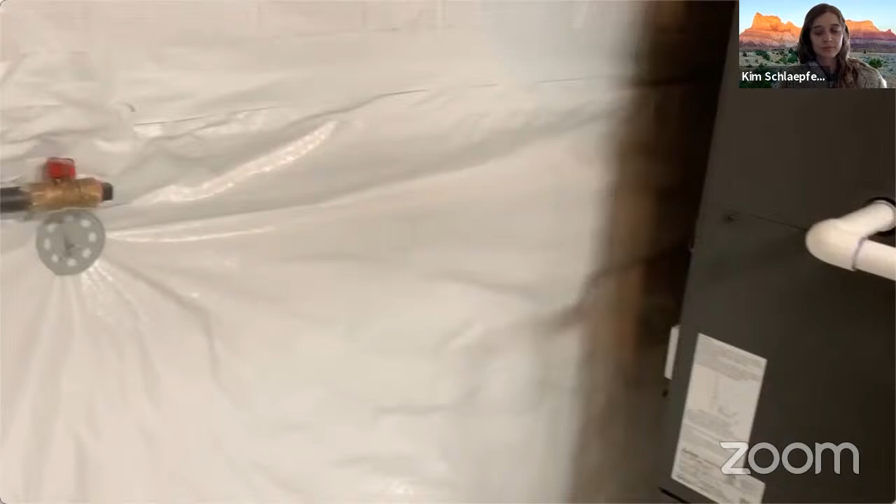Hey, Tim Braun here. Just want to talk to you a little bit about a cool project we have going on to take a standard residential home and see if we can convert it into a net zero home. This project all started when the owners wanted to install a breezeway that connected the home to the garage so they wouldn't walk in snow. But hey, while we're at it, let's go ahead and put a lock-off in so that we have some affordable housing.

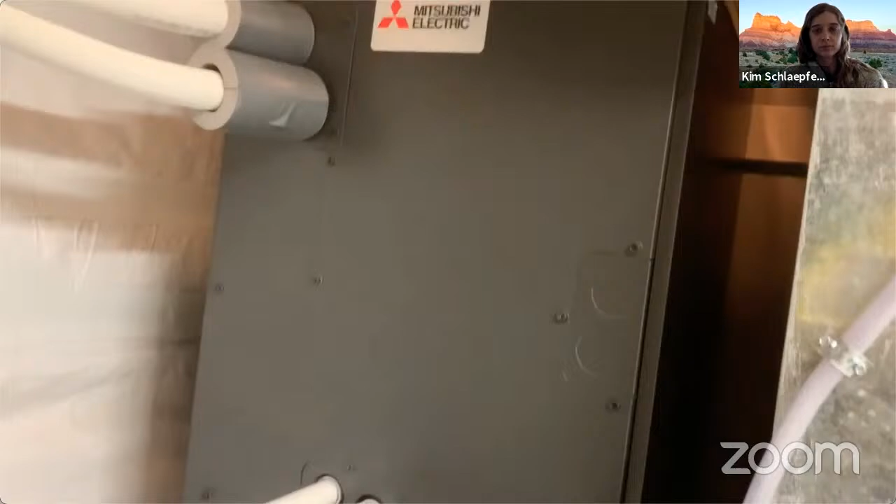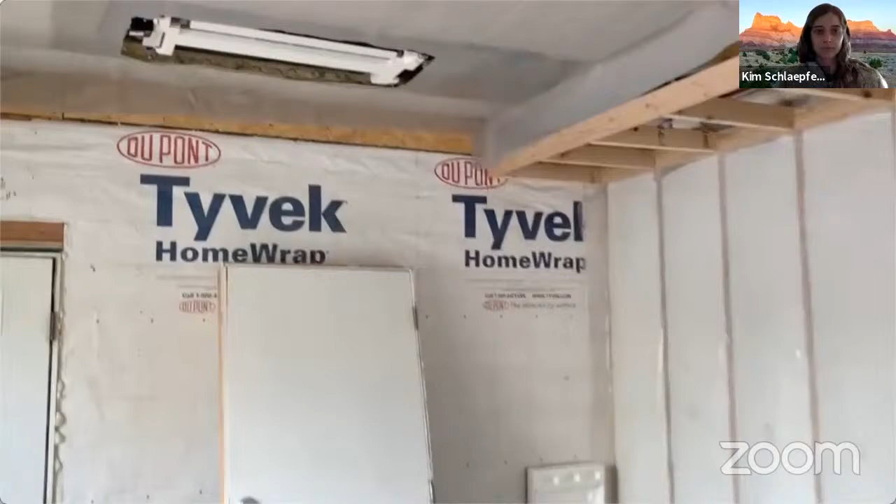If you look, we plugged the gas and went ahead and installed a multi-position air handler from Mitsubishi that is serving the main house. That branch box right there is actually coming from the outdoor unit. It's feeding the main home as well as the breezeway that you can see here is very well insulated. But we installed an EZ ceiling cassette unit in this space. This is the outdoor unit that's serving both of those zones.

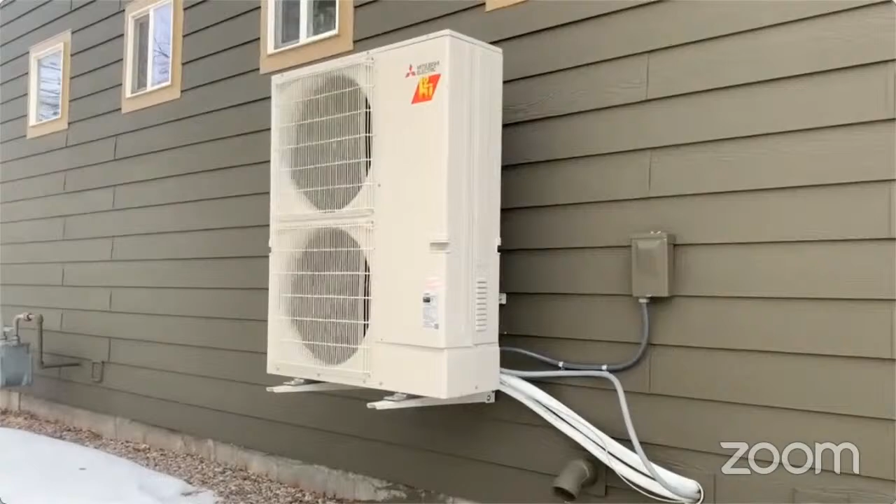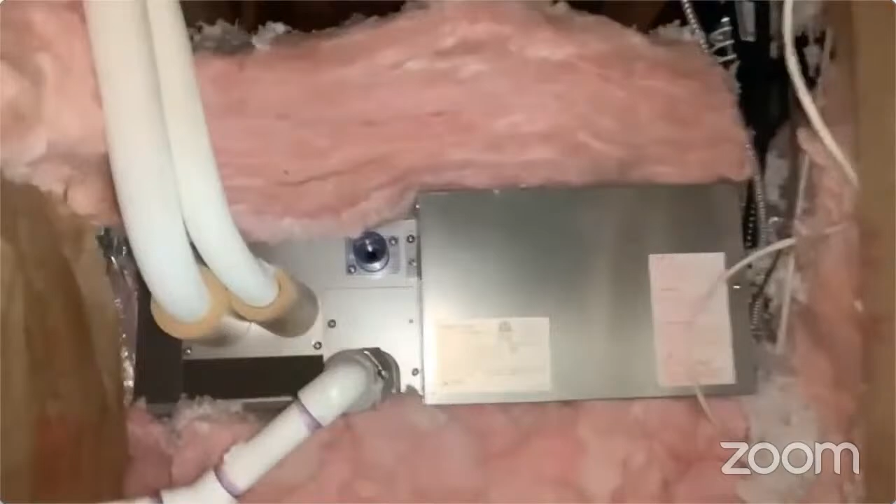This system will go down to negative 13 degrees, and we're just testing to make sure that it does what it says it will. We're up in the lock-off now. This is a ducted system, and you can see the insulator's got a little bit crazy with the insulation up here, and we got some cleanup to do, but all in all, it's very well insulated.

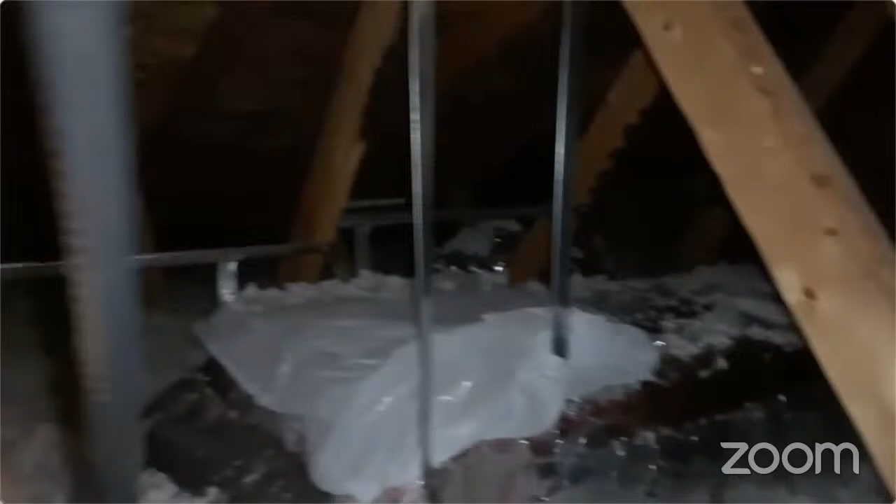It's serving the entire lock-off from the ducted system, and works really well. On the outdoor unit, you can see it's a hyperheat system just like the other.

The big opportunity we have to go net zero is solar generation on the roof. Any connections there would be greatly appreciated.

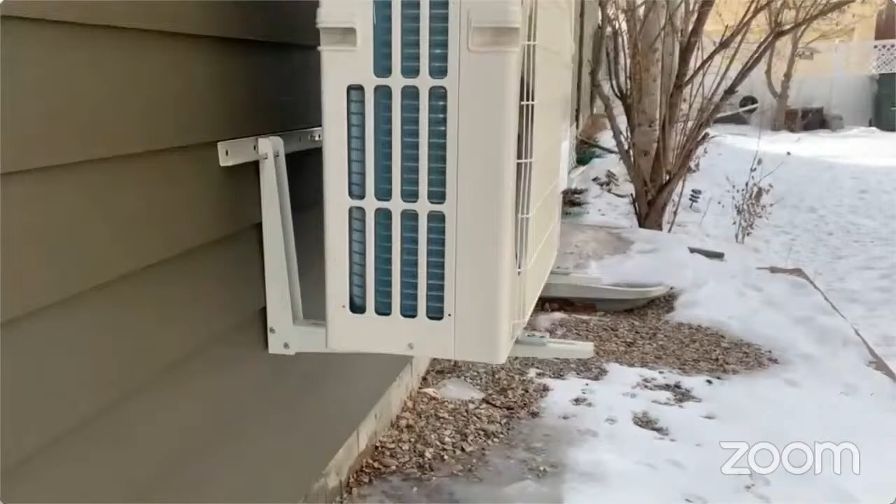Some of the issues we had were these wall brackets causing a little bit of vibration when we were starting up the system. Also, with adding square footage to the home, we've got to consider the amount of power that's going to these homes. But all in all, the system went really well. We could have gotten the equipment a little bit faster, but it was an awesome project altogether. Thank you for all that you do, and thank you for listening, and have a great day.

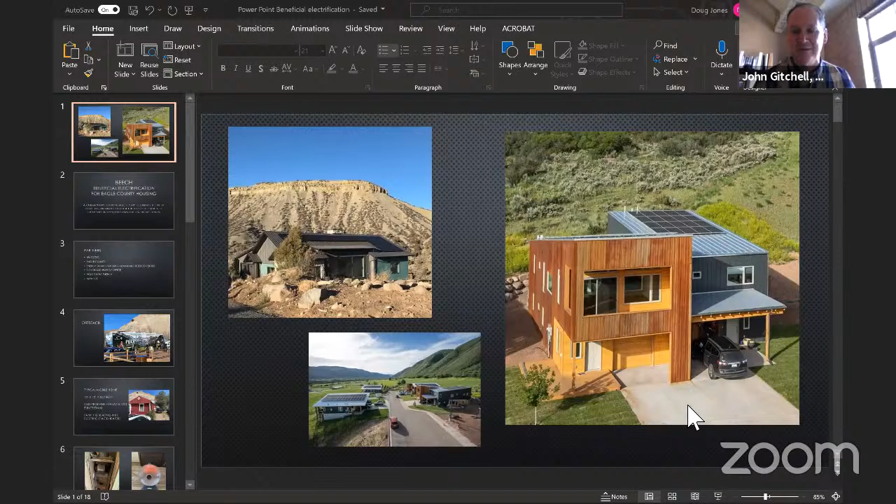I do want to say that our close friend and colleague Seth Bossum was deeply involved in this project, and he helped with all aspects in the planning and in the energy modeling, and just in his overall thoughtfulness and care with every step along the way. So with that, I'd like to introduce Doug Jones. Doug is the director of the weatherization team for Northwest Colorado Council of Governments, or Northwest COG. Their programs deliver services to income qualified families in 13 different counties across northern Colorado, including Eagle County. Doug and his colleague Nate have been leading this weatherization group for over 20 years. I want to turn over the presentation to Doug, and thank you for being here today, Doug. Thanks, John.

See if I can't pull this off.

Basically, the BEECH project is bringing beneficial electrification to Eagle County residents, low income. It's bringing different funding sources together to provide beneficial electrification to low income clients in Eagle County.

We started talking about this in February of last year, and then of course the virus hit and we took a big break. Then we really got on it this summer, and we were able to pull off three mobile homes, capping off the propane and installing a nice beneficial electrification package.

So the way this works is we get people signed up for our program, qualified individuals who are low income. The Dotsero mobile home park was just the perfect place to try and do this because they're propane, they have a high fuel cost, and there are people in need there.

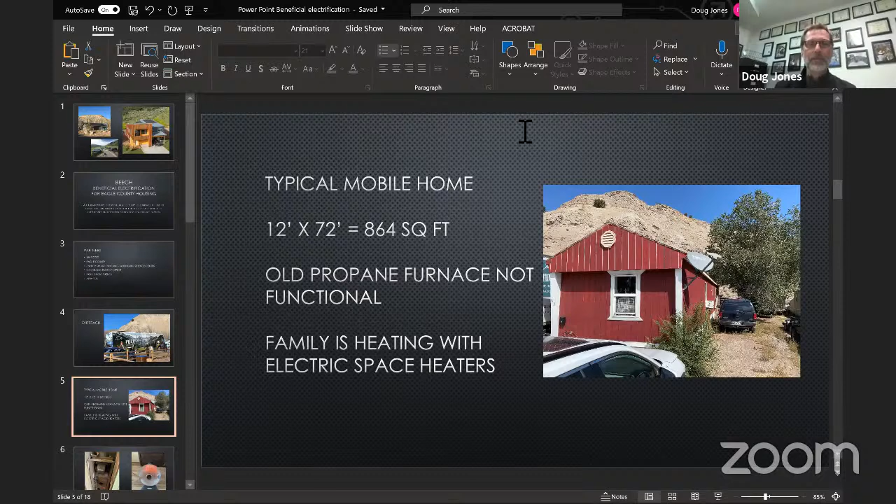Basically, the typical mobile home we worked on, the families, two out of the three mobiles we worked on were heating with electric space heaters because their old propane furnace was broken. They had no incentive to really get that fixed, and just because of the high fuel cost anyway, they're paying so much money to heat their home every month. Why not just use electric space heaters instead?

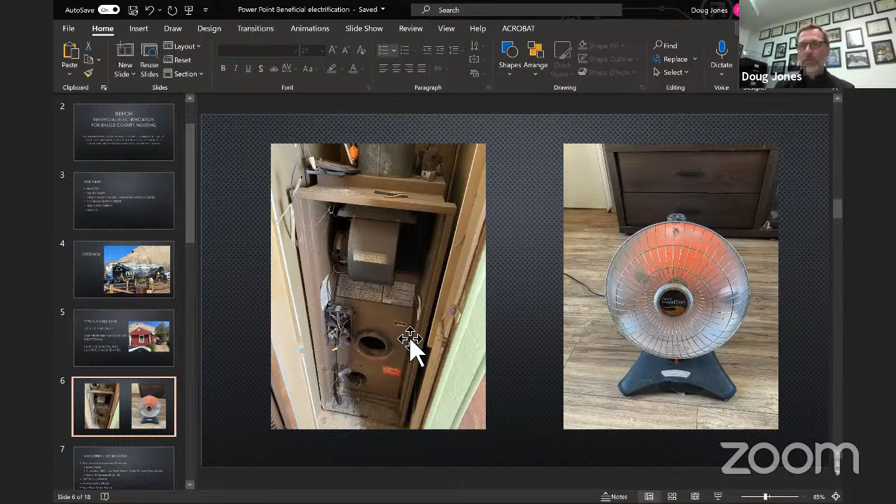And so that's what you see there. There's the old mobile home furnace that was just worn out and tired. And they were taking electric space heaters out and moving them with them from room to room as they were in the different rooms every day.

The process was we went out and did the weatherization assistance program, which is what we're good at, where we go out and save energy on low income households, basically throughout 13 counties in Colorado, in Northwest Colorado. So we go out and do a thorough energy audit, and we add measures that save energy like insulation, LEDs, and storm windows.

After that was complete, then we had DJ Electric out to upgrade the electrical system for us. So it started out as a 100 amp service, and that wasn't enough to run our beneficial electrification package, so we ramped it up to 125 amp service.

A few of the breaker boxes had to be replaced. One of them was about to catch fire when we showed up to look at it, and melt. So that was a nice upgrade to pull off.

Then we installed the beneficial electrification package once we had the foundation of the electrical in there, with a cold climate air source heat pump, a heat pump water heater, and we did a nice induction range with new cookware too, to have them have some buy-in and set them up for success.

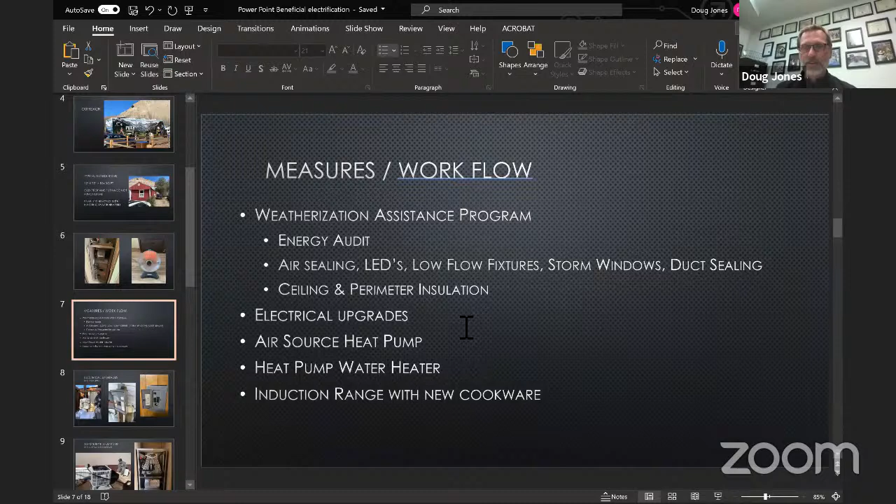We had the first three, we used two great contractors, DJ Electric out of Eagle. His family, we got lucky with DJ - his family actually ran all the electrical for this park back in the day when they were building this park. So he knew all the ins and outs and was a great, great partner to have.

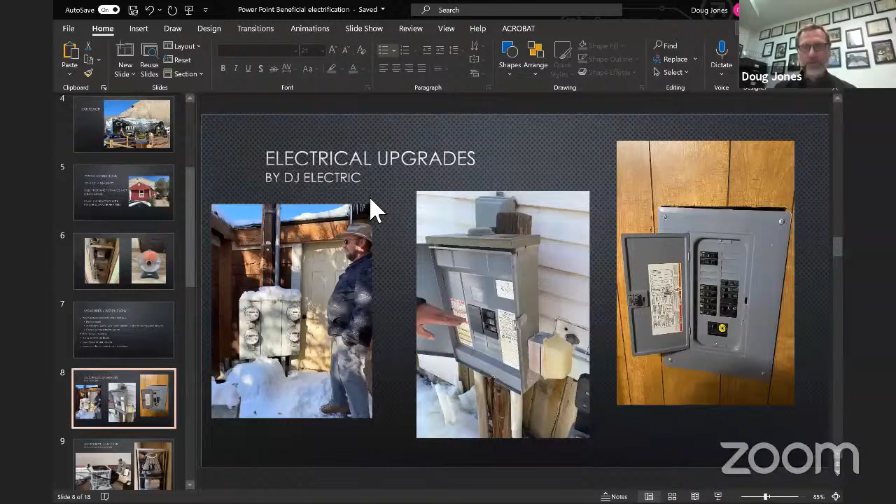And then we also had Diamond H Enterprises and Sam come out, and he put the heat pumps in, he put the heat pump water heaters in, and then we came in behind all that and put in the induction ranges. Along with that, we trained with Sam so that now we're up and running and we have our staff trained, so now we're going to be able to do this in-house and basically lower our cost.

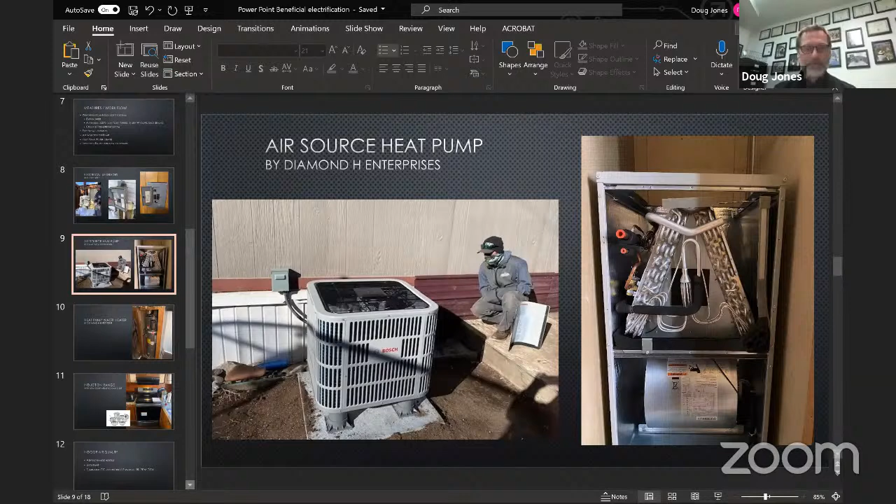So that's the outside unit. The way these work is that they take heat out of the outside air and basically deliver it to the inside air with a refrigerant line. So the technology is just pretty much amazing.

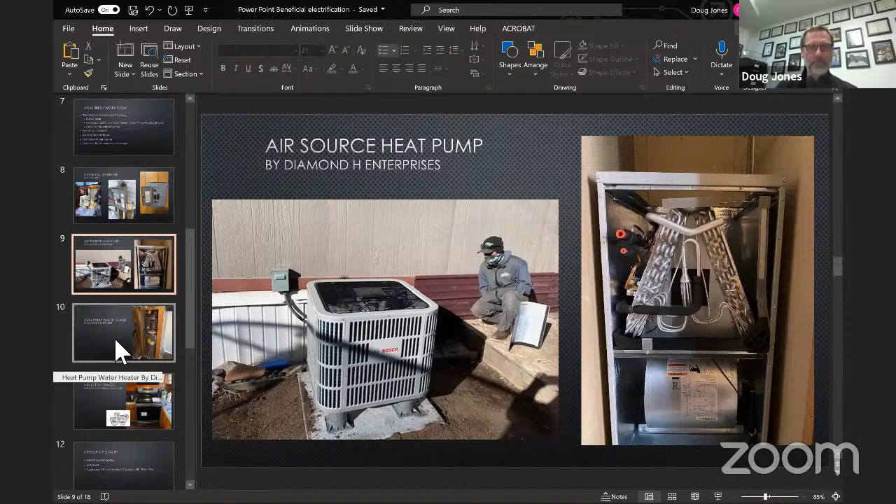The water heaters we took out of there were around $400 or $500 a year for domestic hot water. That's how much they used to pay. Well, these heat pump water heaters from Rheem cost about $100 per year for domestic hot water, according to the sticker. So that was a nice improvement.

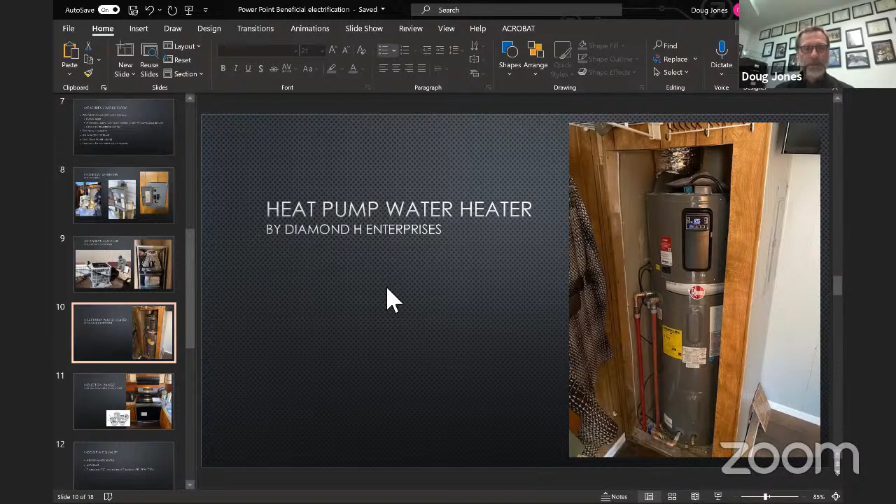The original ovens were producing right around 80 parts per million of carbon monoxide, and that was just coming right out into their house. There were no exhaust fans. In a tight little mobile home, that can really lead to some bad effects coming off of that. So it's nice to get that out of there.

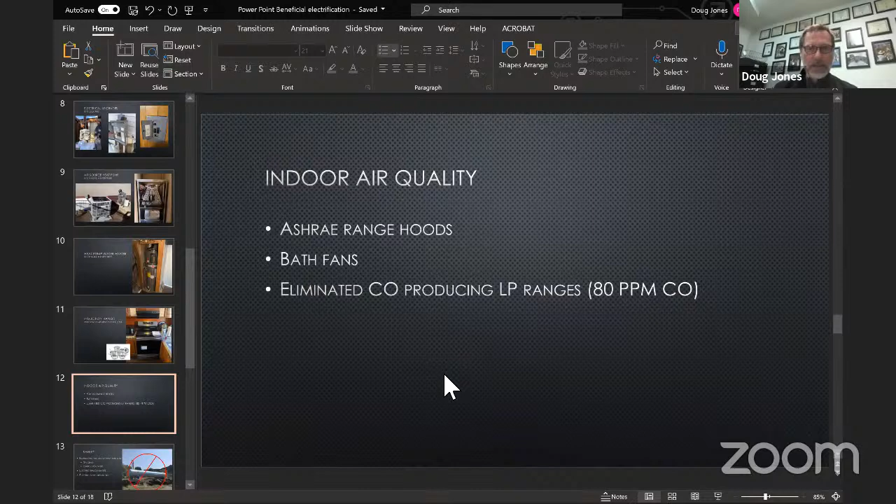We eliminated the potential for gas leaks and carbon monoxide. Moving space heaters from room to room, it's only a matter of time before something bad's going to happen. And we saw some pretty bad conditions with the existing electrical that we were able to fix in the process of upgrading their electrical. So that was really nice too.

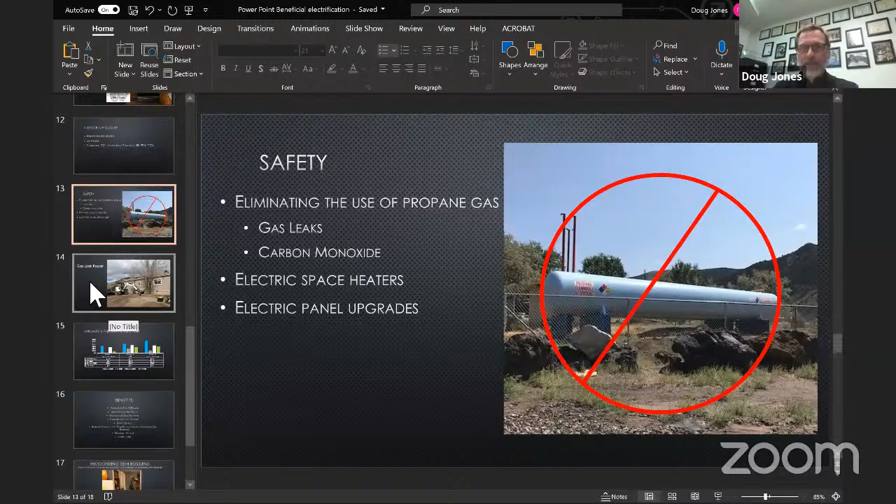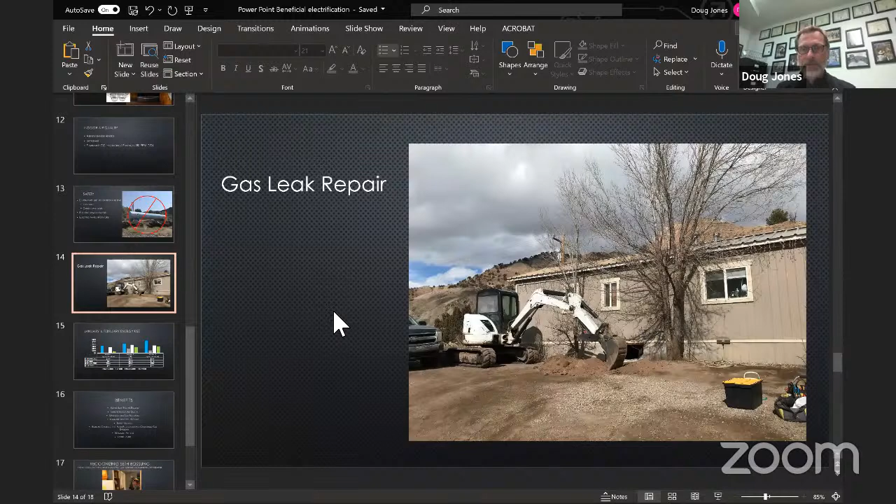So, energy savings. We installed these, got the whole package done basically by the middle of December. So we've had 2 full months to evaluate electric savings.

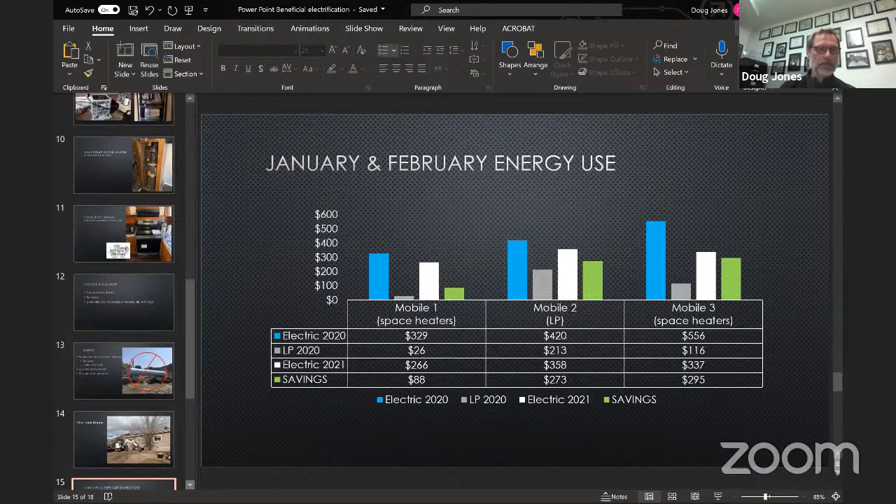Can I ask a question, or do you want me to wait to the end? I have 2 more slides. Okay, all right.

So overall benefits, just to recap: we're helping out low-income families, improving their indoor air quality, upgraded and safe electrical now, eliminated the risk of propane with gas leaks and carbon monoxide, and we're seeing great energy savings, eliminating the combustion of fossil fuels and related greenhouse emissions.

And now this is a repeatable project. Now that we've designed it, we can move on to the next 2, 3, 5, 10 mobile homes and be able to do this. And the real great part is we wanted to inspire others to be able to do this as well. So we cover 13 counties, and we've had 4 different entities reach out to us who heard about this project. We look forward to rolling this out outside of Eagle County in the near future.

And then, as John mentioned, we want to recognize the contribution that Seth brought to this project. We met every week, and he was a big part of the design of this project. So we just want to say thank you, Seth.

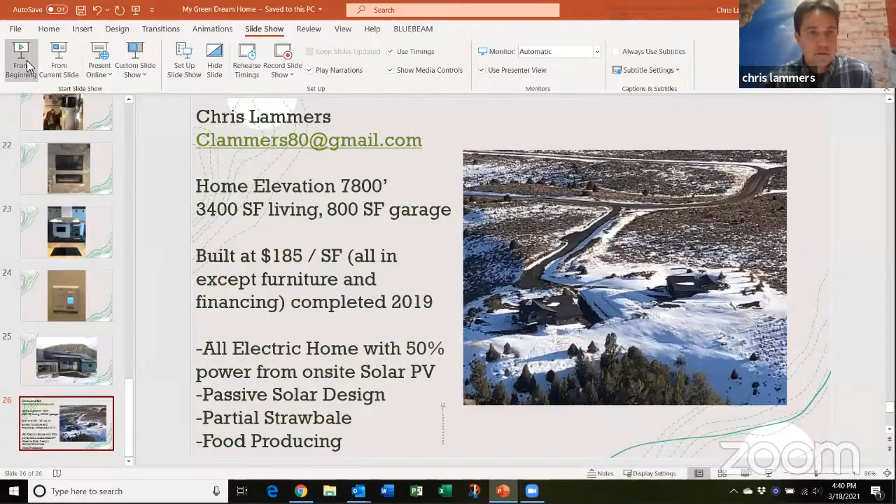Thank you, Kim. Thanks for bringing us all together today. So let's see, I just hit share screen, or what do I do? Yep, that should take it over. Here we go, I can see it. Okay. Perfect. Well, thanks, Kim, for bringing us all together today. It's great to hear other people's stories, and see you again, Doug and John.

For you guys who don't know me, my name is Chris Lammers. I've lived in the Vail Valley since 2003. I've worked for a few local general contractors and subcontractors. I currently work for Vail Custom Builders as a project manager. However, I'm here to tell you about my story of designing and building my green dream home located in Wolcott.

It's located on 40 acres in Horse Mountain Ranch. I've been pursuing this dream for about 20 years with the goal of building the best green dream home I could think of. I tried 2 prior times but wasn't really too successful there, and happy to say my 3rd time, I now have a new home for my family, and also a separate home for my dad, which we're now starting to rent on VRBO and showcase a green home to anybody who wants to come stay with us.

So here's my primary house. In my 20 years of home building, studying emerging green technologies, and getting a bachelor's degree in construction management, I tried starting a straw bale home building design, and I've been touring green homes and earthship homes, attending many green building conferences. I'm a LEED AP and I've managed a few LEED projects when I was at RA Nelson. Working with some great builders around here, we get to work with some great designers and architects, and bringing that all together, I was able to design my own house.

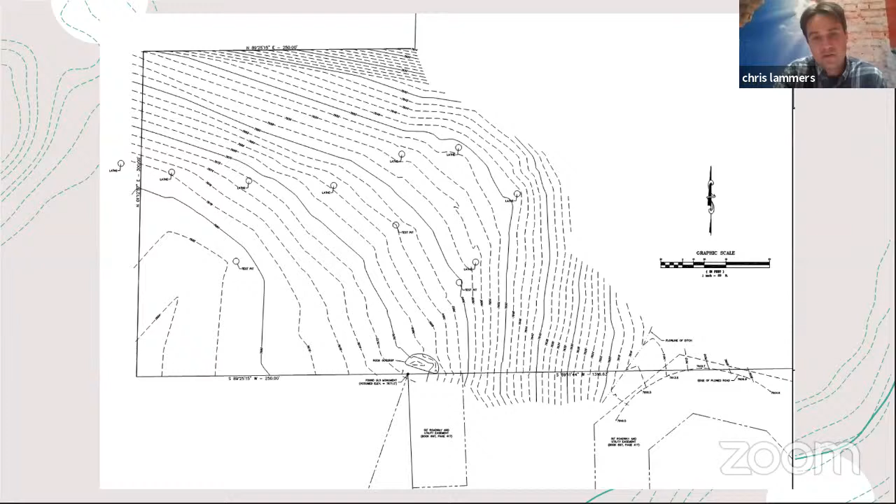I got a little crazy in the beginning and wanted to put in this big pond and water feature, and I even got a water right since I have Alkali Creek running through my property. But later on, it looked like it was a little too much of a project and a bit of a budget buster. So we changed it out to a small on-site water tank to store water for the fire department.

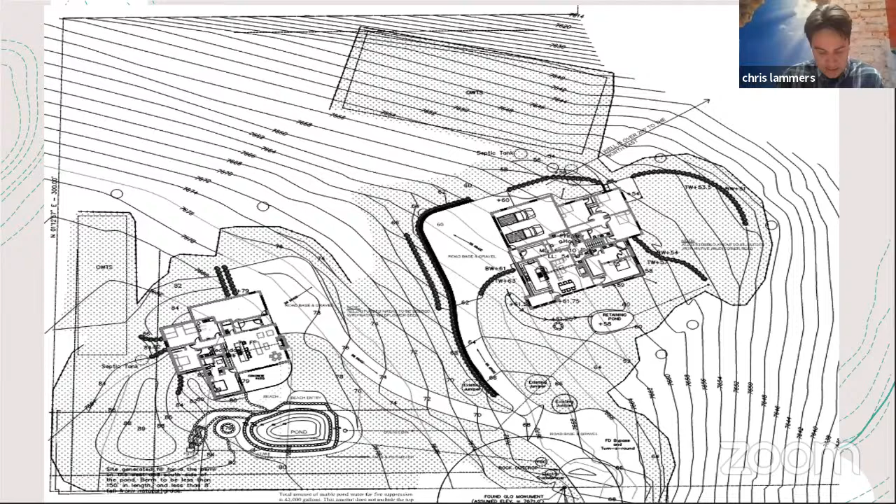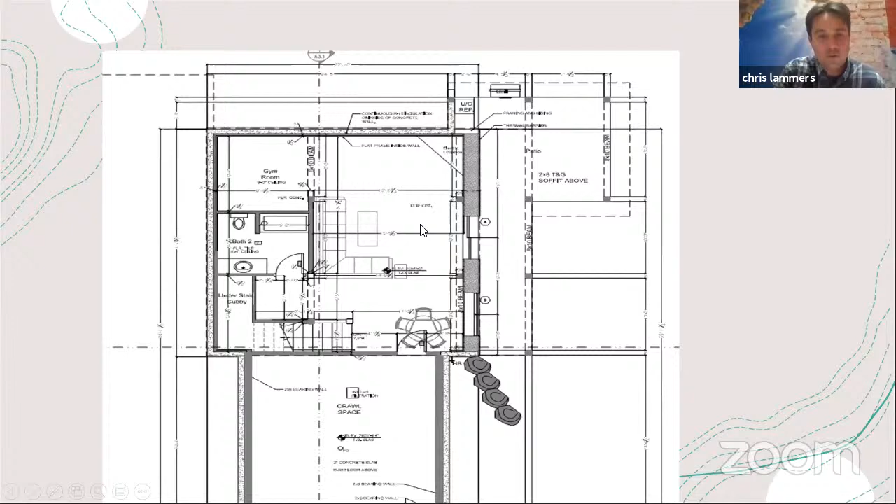I wanted to keep that garage air out of the house, but have a little covered entry. We have a mudroom entry here that works really well. And as you come through, you can see that big view of the Sawatch Range through my big southern facing windows right here.

Our kitchen's attached to the living room, entertaining room. Keeping the master bedroom suite away from the kids was another feature I wanted to do, just to give me a few more minutes away from the kids when I needed it. And then we put an attached greenhouse here, which is about 6 feet by 10 feet, and slowly worked in a hydroponic greenhouse system there.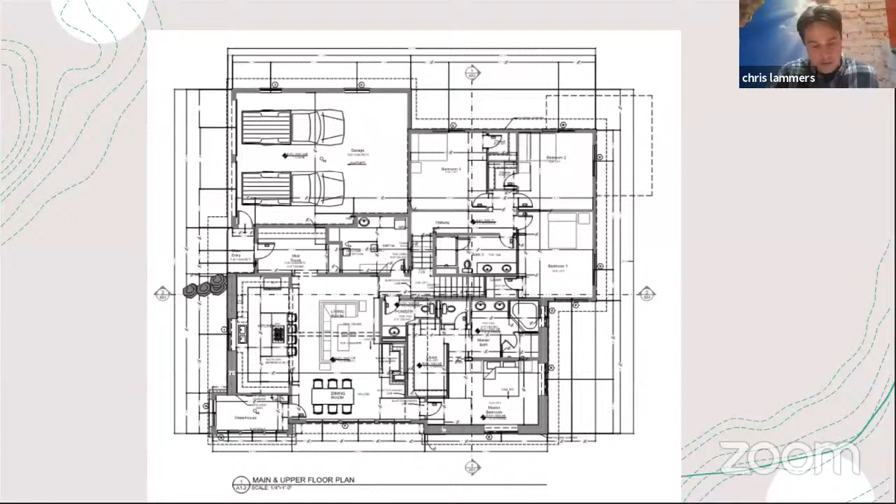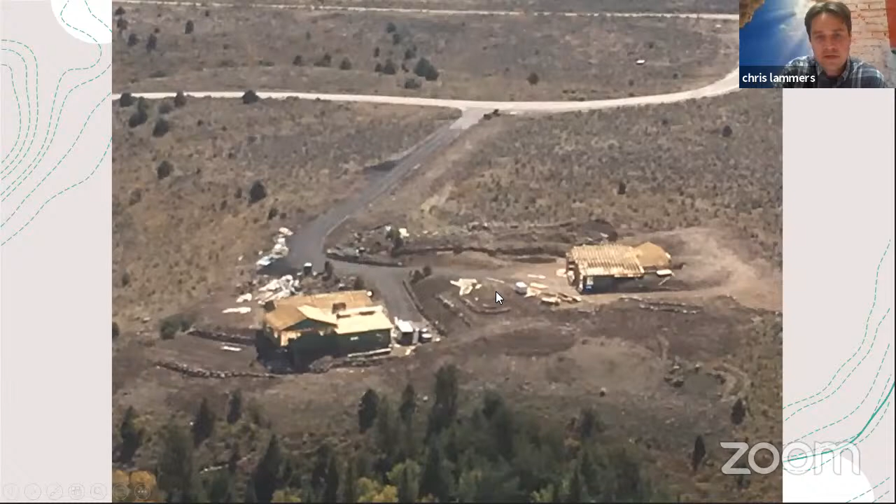Some of the things I didn't mention on the floor plans: we did some straw bale construction. That turns out to be a nice, real thick wall. We can see it in some of the window jambs, door jambs. Ends up being about a 22-inch thick wall, with an R value of about 42. It's nice to use a natural material, and we covered it with about 2 inches of plaster on either side, a natural plaster system.

Some of the other framed walls and in the roof, I did all spray foam. So I did an exterior continuous insulation zip panel, and then another 2 inches of spray foam, and had to fill the remainder of the cavity with batt insulation. As we got that all super insulated, I did some blower door testing to see where I was, and sealed a few more holes. At the end, when the home was move-in ready, we got below 1 air change per hour for the house.

Some of the other things, we tried to do a little bit of berming in and position the garage on the north side, unheated, which acts as a buffer to some of the colder air coming from the north and west. And being below-grade construction, like in front of this kitchen window here, grade is about 6 inches below the windowsill, which helps temper some of the temperature swings.

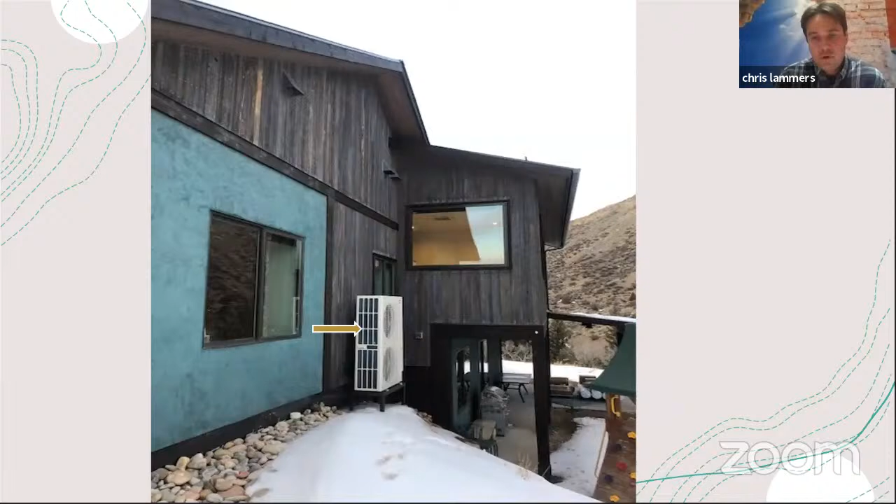Then I mentioned we're all electric, so it's nice to hear some of the other projects where this is getting incorporated. You guys talked a little bit about how we have an outdoor condenser. Something nice about being all electric is I don't have combustible gas piped all through my house and put into a burn chamber, hopefully capturing all the venting and going out the roof. It's also nice not to have a big gas meter hanging off the side of my building or a propane tank in the front yard.

Going into this, I was nervous - it's a little bit new technology. You hear it stops working at -15, -20 degrees, so I was a little nervous there. I took some precautions with super insulating, and I put some backup heaters on the ducted areas of the house. But after 2 winters, I can say there's not been one issue whatsoever in getting up to my set point temperatures.

This whole system runs on programmable thermostats, so it turns down during the night, then ramps up in the mornings when we wake up. As we leave for work, it just shuts itself off because we turn the set points down. Then a half hour before we come home, we turn the heat back on, and it's nice and toasty until we go to sleep again, and it turns itself down.

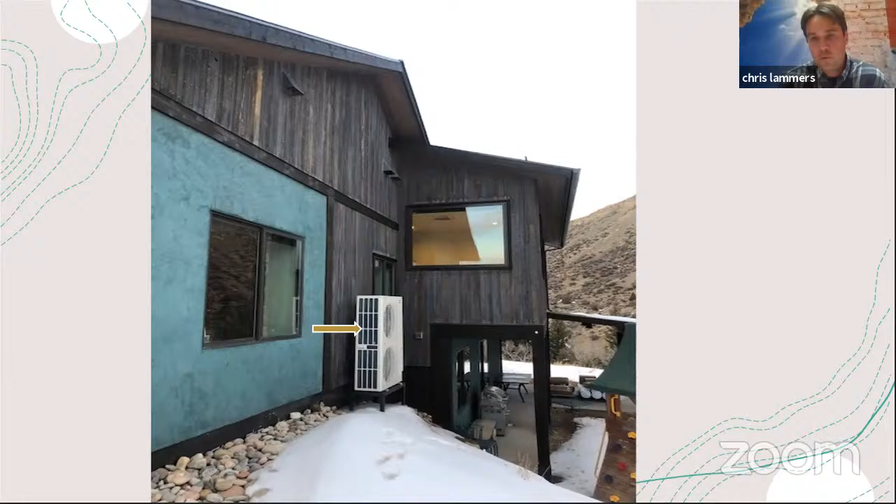Going all electric, I'm used to building a radiant in-floor heating system, so to compensate for that, we did some heat mat underneath the tile in the bathrooms. It's on a programmable thermostat, and that's about 100% efficient, since all that heat going in is making its way into the house. It's nice to have a tile floor that's warm in the morning when we take a shower.

Some of the larger rooms in the house, like the great room and our master bedroom, are with the ducted systems. We tied our ERV into this system, so fresh air is being brought in through the ductwork. We also exhaust all the air out of the bathrooms - some areas where you get a little humidified from the showers, or the toilets can start smelling a little bit. So I thought that was a pretty nice way to do it.

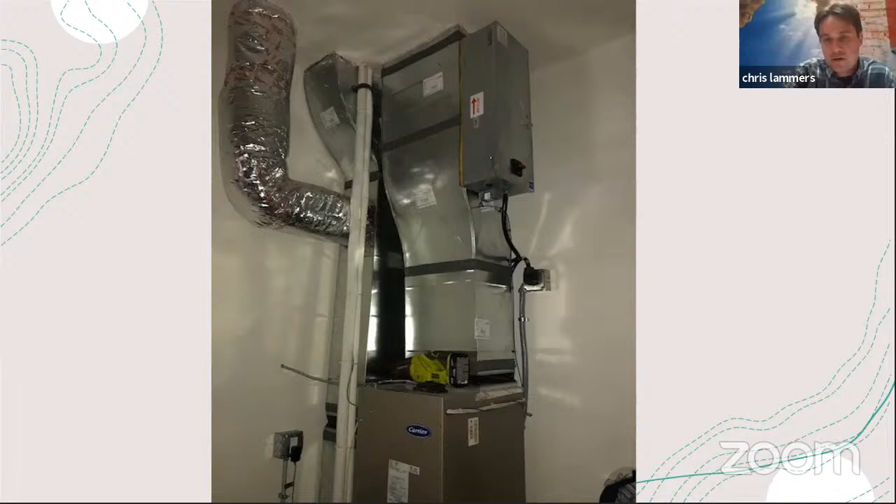It's all on an adjustable percentage timer, so if we feel like we need more or less fresh air, we can adjust that. In some of the bedrooms upstairs, we did ductless units with a ceiling register. Luckily, my plaster system on the walls matched the trim kit for it. These systems are great for smaller areas, we can zone that room independently. So if someone's not staying in our guest bedroom, we can shut that down, and it's programmable as well, so we heat it up in the mornings and when we get back.

One benefit of an air source heat pump is you get air conditioning. I never really thought I'd need air conditioning, but now that I have it on some hot August nights, it's just such a wonderful thing to have.

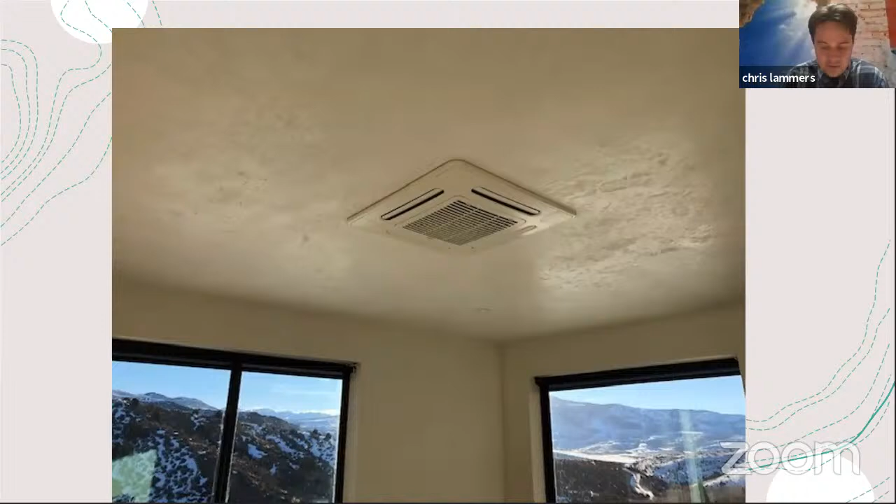Hey Chris, just a really quick time check. We got about 2 more minutes.

Okay, very good, thanks. Downside to all electric is electric fireplace. I was lucky enough to find one that I think is aesthetically pleasing here.

We did induction cooktops in the kitchen. I think this one turned out pretty nice, and you'll be pretty amazed with how fast hot water heats up.

A downside to living in the mountains is you need heat tape. I did this heat tape timer control that turns it on only during the daytime when water is melting.

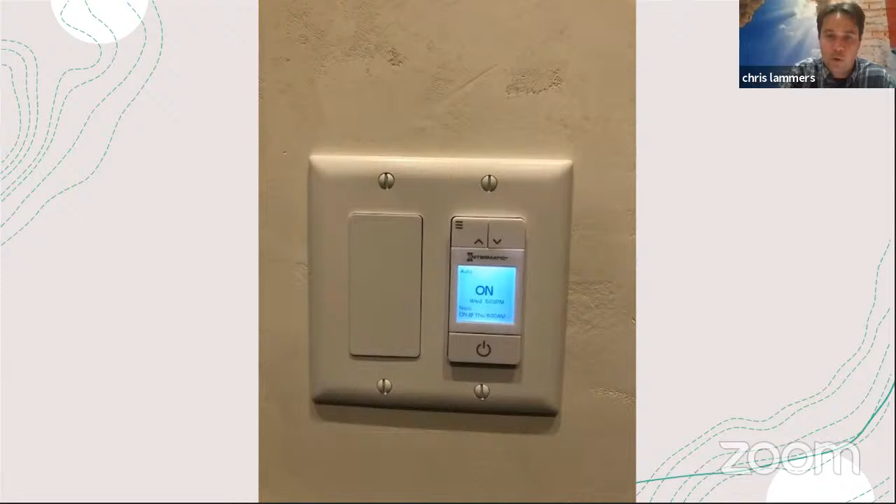I have 26 panels on my roof facing south, about an 8 kilowatt system, that gives me about half of my energy usage. My first year's energy cost after the solar PV was about $900 for a 3,500 square foot livable house. Having a great electrical provider like Holy Cross, we're now paying an additional $76 a year, and that energy we purchase is all green power.

A few other items I wanted to mention: all our appliances are Energy Star, and it's 100% LED lighting controlled by Amazon Alexa and apps on Wi-Fi switches. We can leave the house and say 'Alexa, turn off all lights,' rather than me running around turning off lights.

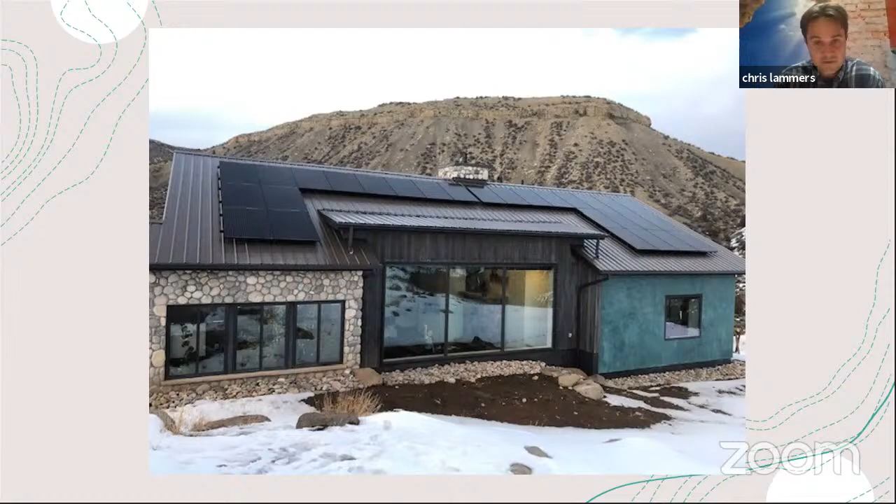I sorted much of the on-site river rock from the excavation. I used it in the masonry and landscaping, and needed to buy just a little additional material. I was very efficient in ordering all my materials. I'm proud to say I had only one 40-yard dumpster leave this job site for building my dad's house and my house. In truth, I burned a lot of wood on site, and made a few runs in my truck, but I think that's pretty amazing.

All the plumbing's low flow fixtures. The carpets are made out of recycled PET plastic bottles. The concrete floor is very durable, eliminating the need for additional flooring. Our garage is wired for electric vehicles, and I can't wait for some affordable electric trucks to come out.

We fully compost and recycle. We're planning on expanding our outdoor gardening this summer, a lot, and start beekeeping and install a small orchard. In the future, we may even raise some chickens.

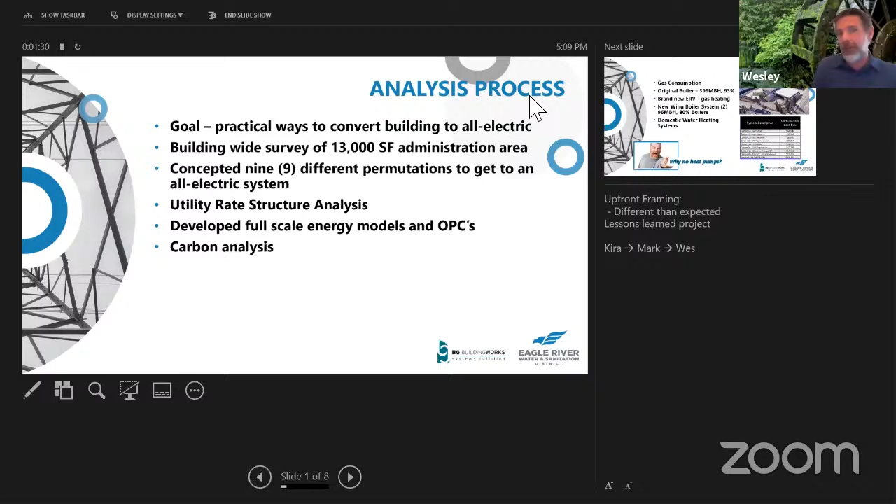Now, this is a great job in a way. This is a theoretical job, done mostly through engineering analysis and software. But what we did do is use engineering load software to do a full analysis of the building. We accurately modeled the existing systems, and we went towards the all-electric system variants that we'd like to analyze. We did a full-scale energy model, an 8760 analysis every hour of the year. Then we backtracked and looked at how much we use between these system options that use gas and electricity, and how the carbon gets produced off of that.

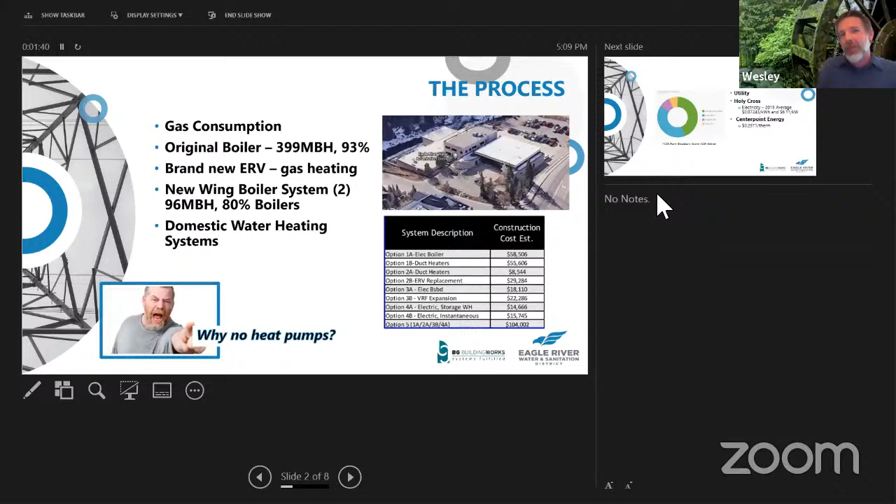So if we head to the next slide there. Part of it is we pulled all those utility bills again. We surveyed, oops, I think we lost our PowerPoint. We surveyed the buildings, and there were still a few things that burn gas.

We had original boilers, and this was a fun building because here's a picture of it. You probably all know it, being from the area. I didn't tell you guys, but I moved to Eagle Valley when I was 17 in '93, and I was actually a resident in Eagle Valley for about 8 years too. But this is the Eagle River Water and Sanitation District right there in Vail. A lot more crowded there when I lived there, but it's still there.

And what we had were expansions. This is an amoeba building that got expanded over time, retrofit over time as systems aged, and you kind of had this mixture of things going on. So we had an original boiler system that was still serving fan coils. We had the brand new ERV we just replaced during the VRF project that was burning gas. At the time, we made the decision to utilize gas because the existing equipment there was gas. The rough-in was there for gas.

Electrification was not a discussion or goal at the time the project started, probably not until about 2 weeks after we got the submittal approved and back out the door to the contractor to build it. That's what I think the timing works out to. So yeah, we missed it by about 2 weeks, but we live and learn, and we got a good piece of equipment there. It's still highly efficient. Other systems that burn gas included boiler systems that ran baseboard in the new wing, and then we had some domestic water heating systems that burn gas.

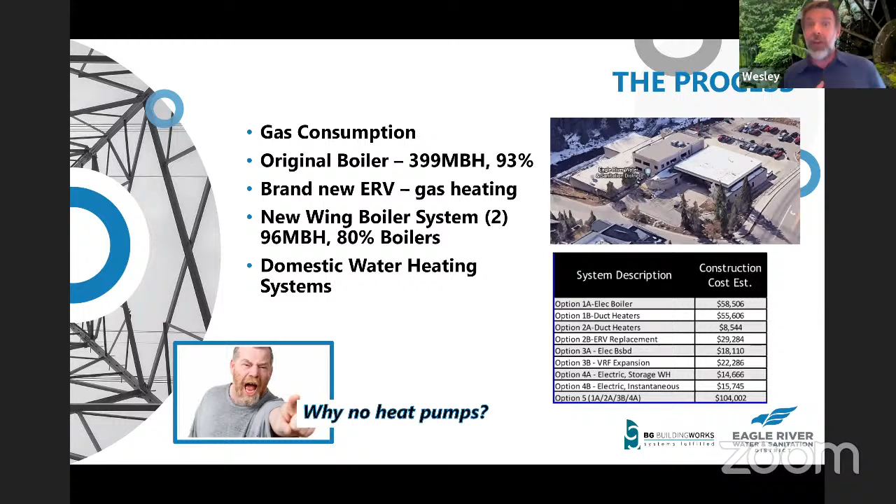Heat pumps would be another great all-electric system that we could have looked at, and that would definitely have to be a consideration if this was a brand new building today.

So moving on in the process, we had all these permutations. We looked closely at utility bills—I always look closely at utility bills, I am an energy guy. Holy Cross is better than the national average as far as how much carbon its electricity produces. But I actually do look at how we break it down, because if we're using a lot of carbon to produce electricity, we got to really think about that as we discuss how we develop this process of electrification.

Side note, Eagle River buys gas at a really good rate from CenterPoint Energy. It's a very low bulk rate that typical consumers don't see, but since they're able to purchase for all their facilities, they get a really good rate on gas. And for electricity, these are the 2019 charges from Holy Cross. So these are the rates we used for cost analysis as we went through this.

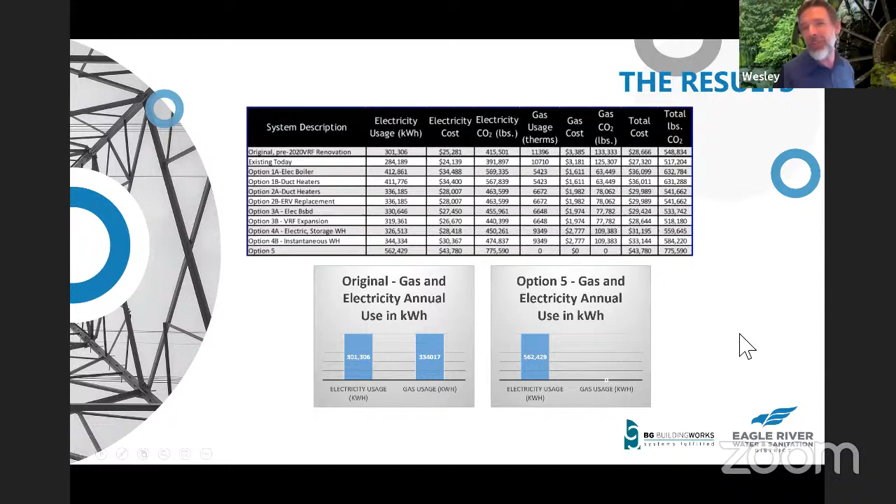Interesting stuff. So if we look at the next slide on results, we can talk about money and costs, which is another item. Electrification is not modeled in this scenario to be cheaper, and that's not always the goal of electrification—we'll talk about that in a second. But through predictive modeling, we're actually going to pay $43,000 to $44,000 a year to run this building, whereas we were only paying $29,000 a year. That's about $1,000 more a month in cost.

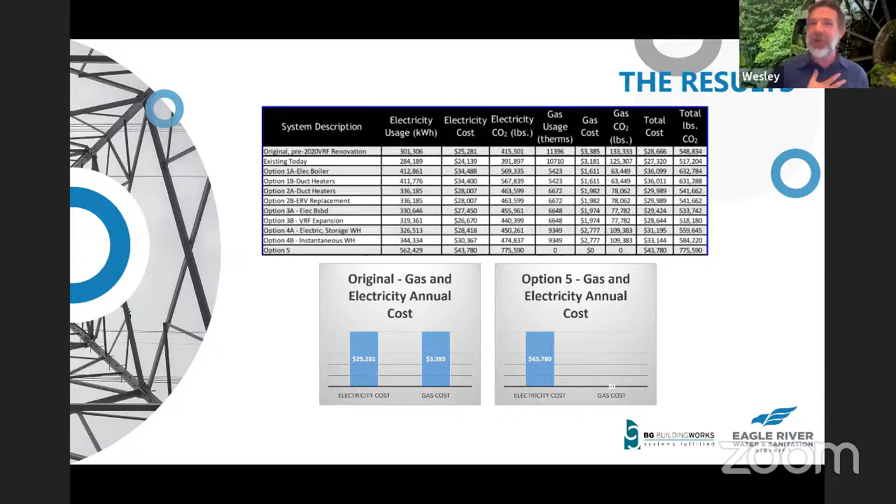So let's go to the next slide. I'll also maybe be showing some stuff here, not as a black sheep, but singing a different song than other people. I looked at the carbon produced from the production of electricity and how much carbon is actually produced by burning natural gas. Gas, when it burns, is mostly methane, and it burns pretty clean, producing a very predictable amount of 0.39 pounds of carbon dioxide per kilowatt hour produced. Well, through statistical data published by Holy Cross, published by electric utilities, published by NREL, we actually produce a heck of a lot more carbon dioxide making electricity than we do burning it with natural gas.

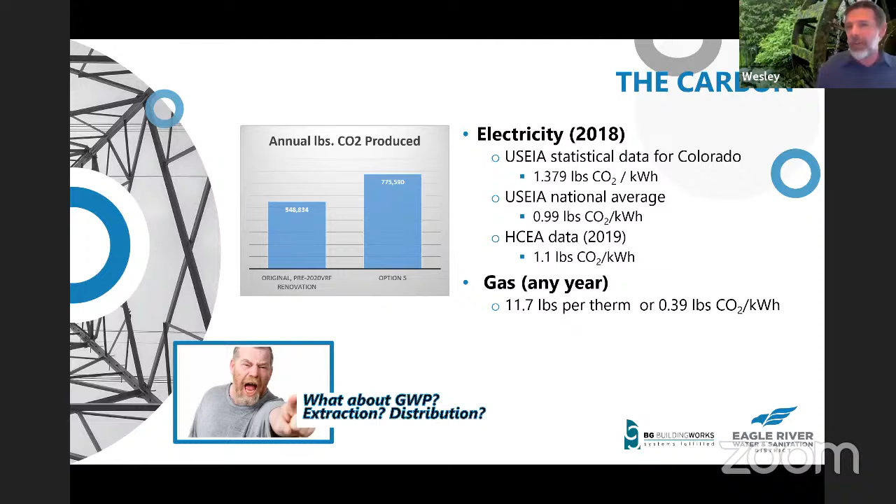So let's go to the next slide—what do we learn? Here's what I learned, and what I'll leave you with. Point one: all electric does not mean less carbon production—it can actually mean more carbon production today, and I'm going to stress that today, because it's very important to think about as we move forward. Point two: all electric can cost more to operate and produce carbon. We're modeling this to not only create more carbon, but to cost more today.

But we got to think about what we're doing and where we're going with an industry. Natural gas is a limited resource. We will run out. They say we're going to run out in 70 years. I bet our scientists will discover some sort of shale fracking technique for gas like oil, extending its life cycle, but it's supposed to run out in 70 years.

When it runs out, we're going to have bigger electric transmission, distribution, and production issues to deal with than we have on the building level. But I can show you a slide towards the end of this presentation, it's a fun slide. One thing we need to be aware of is that as we migrate towards a renewable energy climate, and as we develop green power and our grids get cleaner and cleaner, electrification really will produce less carbon, and it will likely be less in cost too.

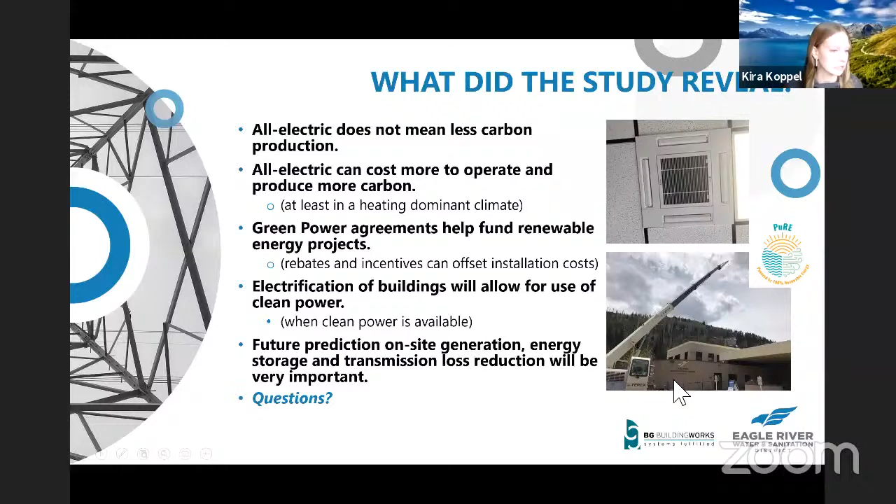Thanks so much, Kira and Wesley, that was an awesome presentation. And just in the interest of time, I'm sorry, I hate that I'm cutting us off from questions, but we had one question in the chat from Richard Mills: did you do a solar and/or battery cost comparison?

We did not do a solar battery cost comparison. The goal wasn't necessarily to be renewable, the goal was to be electric. So we looked at electrifying, not producing solar on site. I mean, I think solar is great and everyone should consider it.

And if you saw that last slide, I didn't pepper in, but my prediction for where we really need to go as an industry is we've got to look at more on-site generation. The biggest losses come from transmission right now, and we're going to run into a generation and storage problem with electricity. So looking at how we handle that stuff on site is going to be very important for the next 20 years of buildings if we really want to make progress here, and that would include solar, of course, on the building, as to your question.

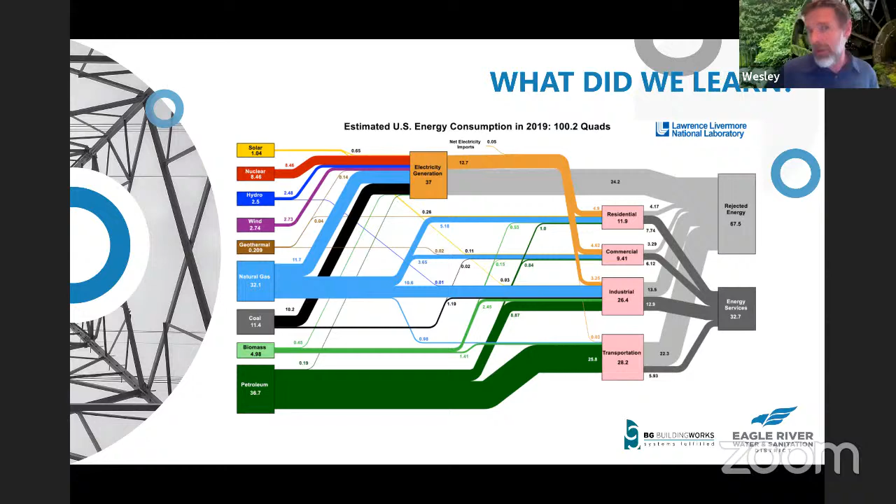Last thing I'll say is we are looking into that for the future, so it's in our future plans, but not this specific project. So if that provides any clarification too.

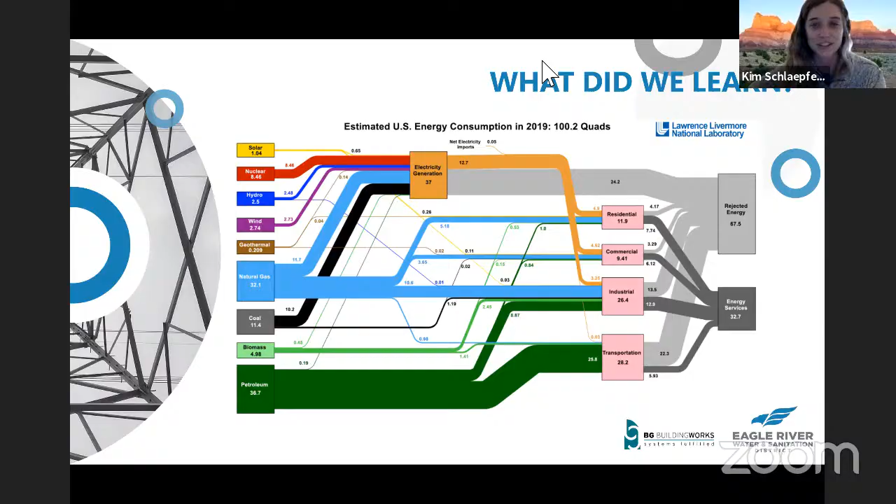Thank you. And last but not least, I'd like to announce our last presenter. We've got Todd Collins from AE Building Systems, sharing about his home in Golden. He's been slowly retrofitting his 1971 Golden home over 9 years, improving comfort and lowering utility bills from $2,200 a year to about $400 a year. Todd will discuss what he's done, the results over time, and what he still plans to do to get to all electric and near zero energy, including low-hanging fruit, building science principles, and other considerations. Please give it up for our last speaker of the day, Todd Collins.

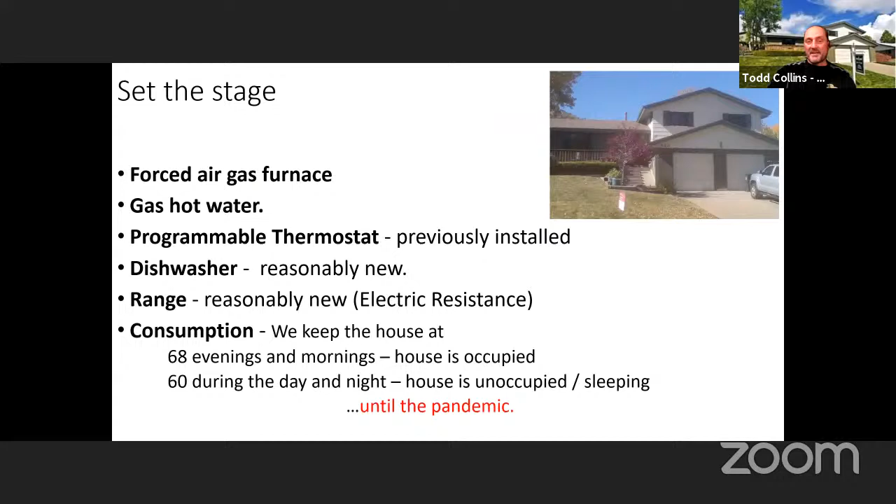Something important is our consumption. We keep the temperature in winter at 68 in the evenings and mornings when the house is occupied, only 60 during the day and night. I work from home, so at 60 during the day I just put on an extra layer and call it good—well, until the pandemic and things changed at the very end there.

Some of the first things prior to the audit in 2011: we replaced the fridge. The old fridge was a Montgomery Ward—I'm not sure Kim is old enough to even know what that is. In short, if your old refrigerator is more than 20 years old, get rid of it and you will get a payback, not just a new fridge but energy savings. Recommended to upgrade your fridge technology. We did renovate the kitchen just last year and bought a new fridge, selling the old one to a School of Mines student.

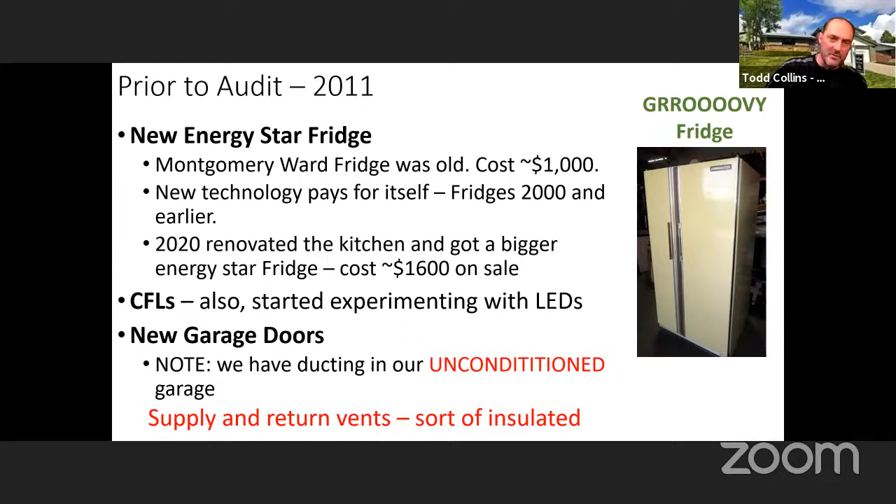We also started immediately changing out all the incandescents to CFLs. We did experiment with some LEDs, but in 2011 LEDs were still pretty white and blue, not very soft, not the greatest. And we installed a new garage door because the two doors that were in the house were really bad and starting to fall apart.

There's more information on that. The old garage doors were leaky, falling apart, very low R value, no glass. We went with an R12 polyurethane filled aluminum door. Interestingly enough, it had better seals and LED light. Well, it had CFL lights and we put in LEDs.

But interestingly enough, in the winter, the garage is warmer than it should be. That's because the garage doors are actually insulative and they hold the heat in, and we're losing heat through the walls into the garage, and through the bedrooms above into the garage. So it's kind of cool that the garage is warm because the doors are better, but it's also a good thing, bad thing. The bad thing is the garage is warmer because we're losing all this heat through our walls.

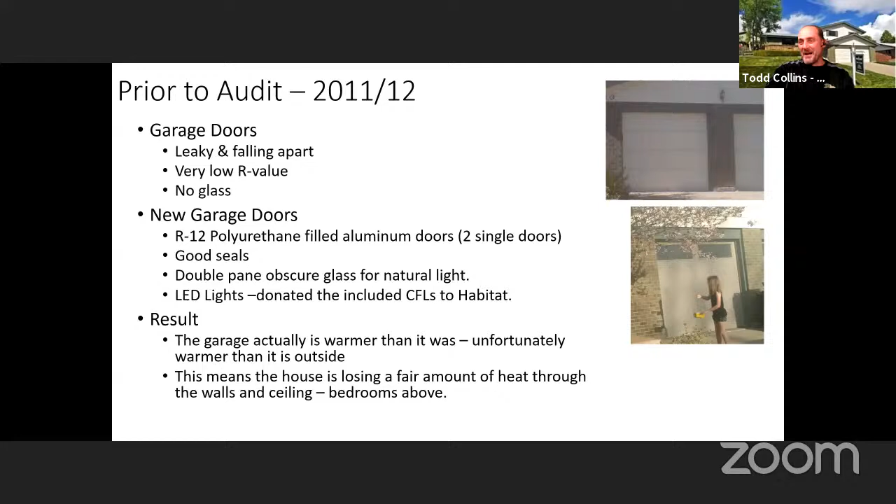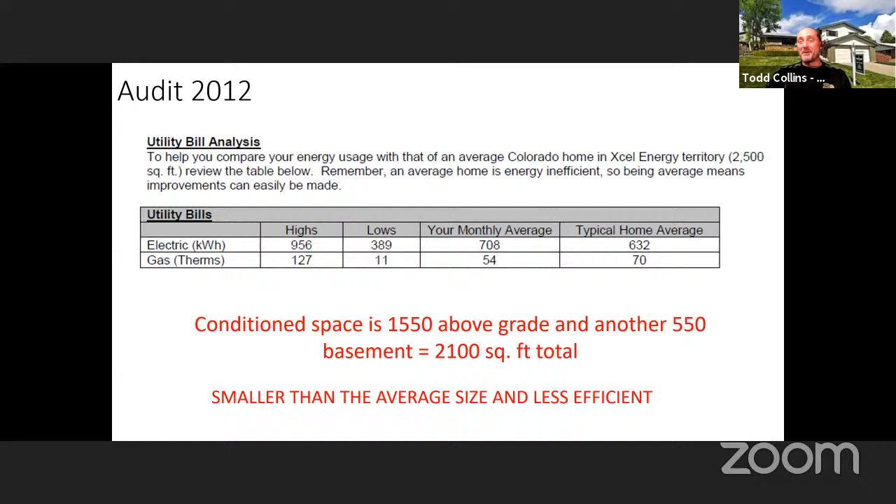But it just gives you an example. So in 2012, we did the audit, and this is some of the information we got back. This is information about typical average usage. Typical home average usage is less than what our monthly average usage was back in '12. That's on electricity, but on gas we were better. But note that our house is only 2,100 square feet, where the average was 2,500 square feet. So we had a smaller house and we were less efficient, with the exception of gas.

So in short, there were some top priorities. Air sealing: you lose 30 to 40% of your energy or heat energy through air infiltration. It just goes right out your walls because you've got little cracks and holes everywhere. So that was one of the big things. On the electric side, it's phantom loads. It was Energy Star certified appliances.

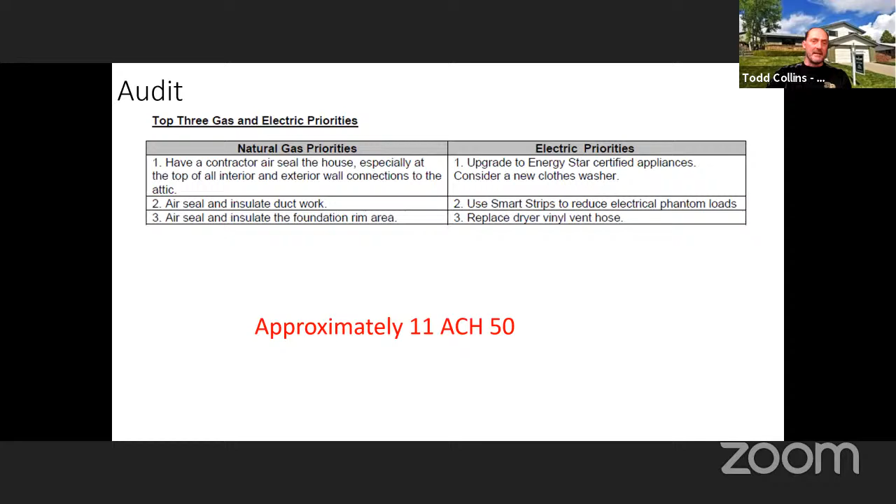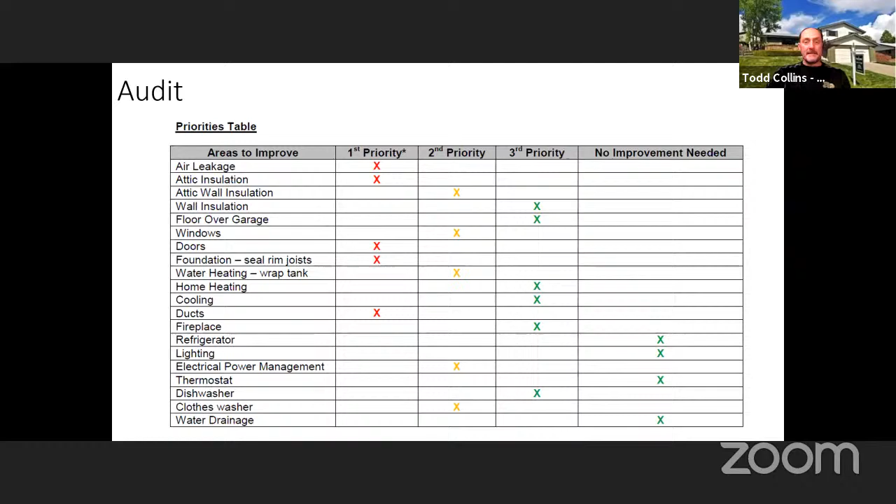There were some other minor things, but when you get your audit, you should get a document like this, and it includes what's first priority, big bang for the buck for low dollars. Second priority might be decent bang for the buck, price a little higher. Third priority are expensive items, and you're going to get a bang for the buck, but will it pay for itself? Not necessarily. And then you'll get something that says you really don't need to do anything here. So if you don't have that in your audit, you should.

So some of the low-hanging fruit stuff from the audit that we did right away was we wrapped the water heater. $40, it's easy to do. And it helps keep your domestic hot water heater from losing heat into the space. It stays in the water.

We put in power strips to get rid of phantom loads. So when we turn our TV off, we turn our power strip off, not our TV. And that cuts the electricity to the TV completely, so there's no phantom load there.

We got a new washer and dryer. That was about $1,400. That not only saves power, but it also saves water. It also helps save your clothes because a front loading washer is not as hard on your clothes as an agitator top loading washer. So something to think about. That was also because the washer and dryer that came with the house died. So if you're going to replace it, do it right. Get the more energy efficient ones.

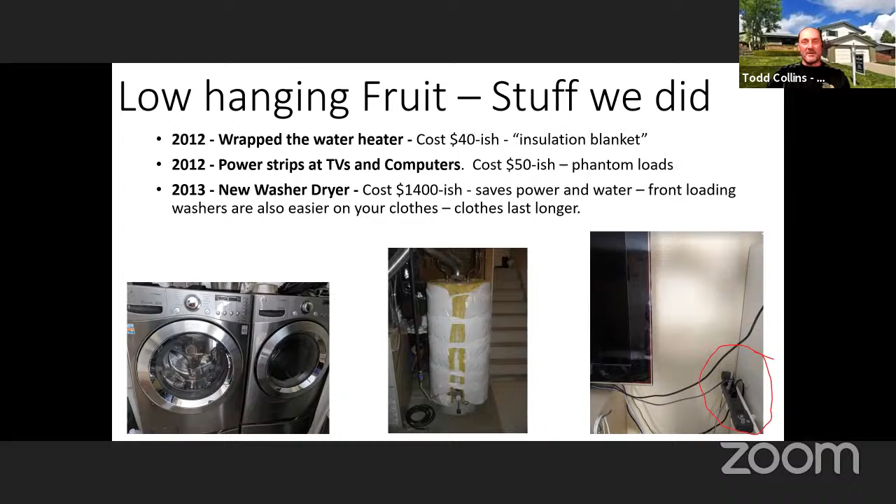We put in new ceiling fans in all the bedrooms, 2 in the living room, dining room, and then another in our family room. That just makes the house more comfortable in the summertime. Really simple, and these are super high efficient ECM, DC based ceiling fans. We also taped up the old duct work to make the furnace more efficient in providing comfort to our spaces.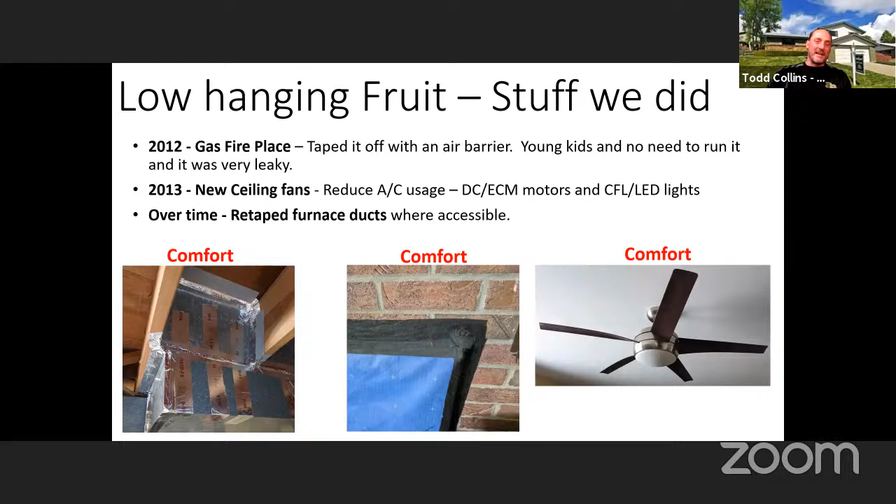So we hired a contractor to do the rest pretty much of the audit stuff, and that includes a lot of air sealing. They put in a new bath fan above the attic so that when they sprayed in all the new cellulose, we wouldn't have to replace the bath fan down the road. Just get it done now. And it's again another DC ECM blower, high performance, low energy use.

They insulated both the skylights and the knee walls with blanket insulation. They also did a lot of air sealing around junction boxes, the gabled end walls. They also put in an attic hatch dam, so the idea is to hold back the insulation. So when you push the attic hatch up, the insulation doesn't come flowing back at you. So literally have like a 2-foot dam, and we went to R65, maybe 18 inches of insulation in our attic, and it made a tremendous difference.

Also, they insulated the attic hatch itself. They put 10 inches of recycled polyiso on top of the attic hatch. So now we have 10 inches of insulation on top of both of our attic hatches.

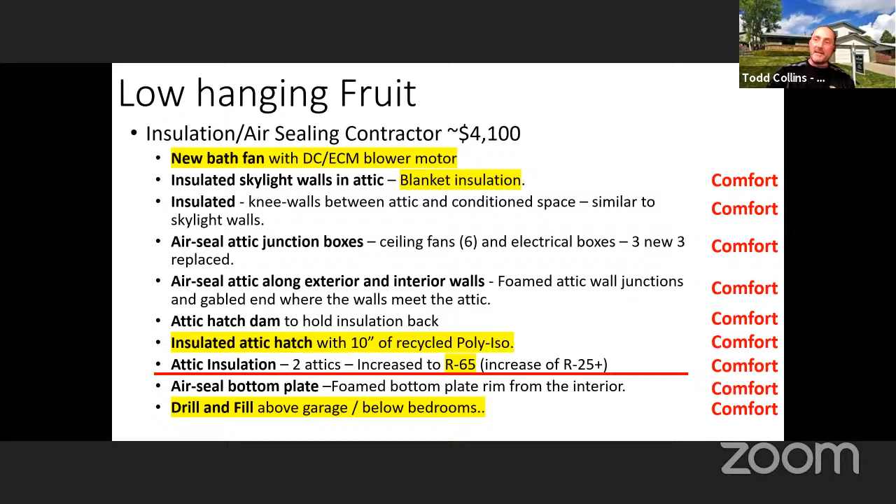The things that were beyond the attic were the bottom plate. They foamed our bottom plate where they could, and then they drilled and filled above our garage, which means they drilled a hole, stuck a hose in, and sprayed insulation in the joists to increase the insulation between the garage and the bedrooms above the garage.

The big dollar items that we did to reduce energy use - the big one was 3.9 kilowatts of solar, and that took care of all of our energy use, all of our electricity use. And that's not a big system. That was about 15 grand installed.

Then in 2015, we replaced all the windows and doors. I like this window pictured in the upper right-hand corner because it shows snow stuck to the window. The interesting thing about that is it means heat's not conducting and melting that snow. It's staying there, and it stayed there for a long time. So these are really good high-performance windows that don't conduct energy to the outside like most windows do. They're European style, a UPVC product, tilt turns for the operables, and they work really well. They also make the house super quiet because they're super airtight.

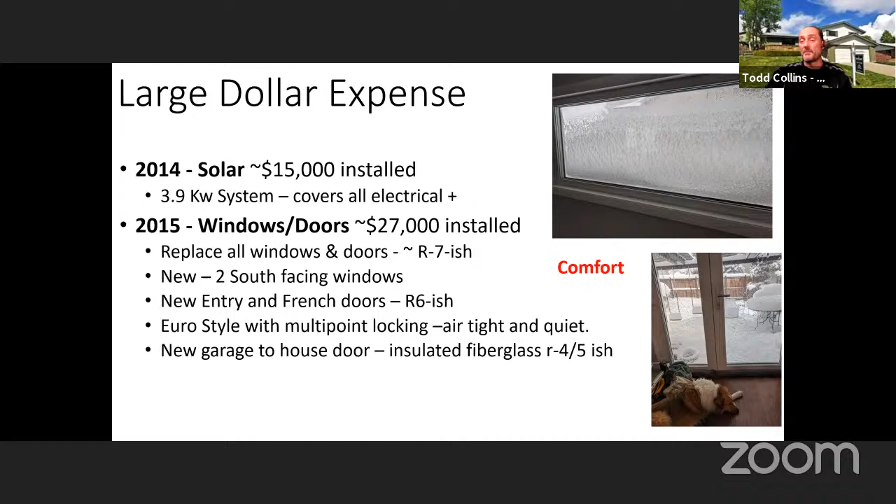Some additional items in 2019: I insulated with continuous insulation, mineral wool, all the walls of my basement. I office in the basement, and it's cold down here because there's a lot of thermal bridging from the inside to the outside. The heat's escaping the house through the concrete. So this insulation made a tremendous difference in comfort.

We also taped the bottom plate to reduce air infiltration. And then most recently, as we did a kitchen remodel, we replaced the old electric resistance range with an induction cooktop, convection oven instead of electric, new fridge. We sold the other one, new dishwasher, and then we put in a Nest thermostat as well, which is a bit better in that it's a learning thermostat. And we're pretty much all LEDs now - we've got a couple CFLs left and some ceiling fans, but that's it.

This picture to the right shows the heat loss from our basement to the exterior. You see how it's lining up orange? That's heat coming straight out of our basement and going right through the concrete. It's awful. That's the picture of the sidewalk and the edge of the concrete right here.

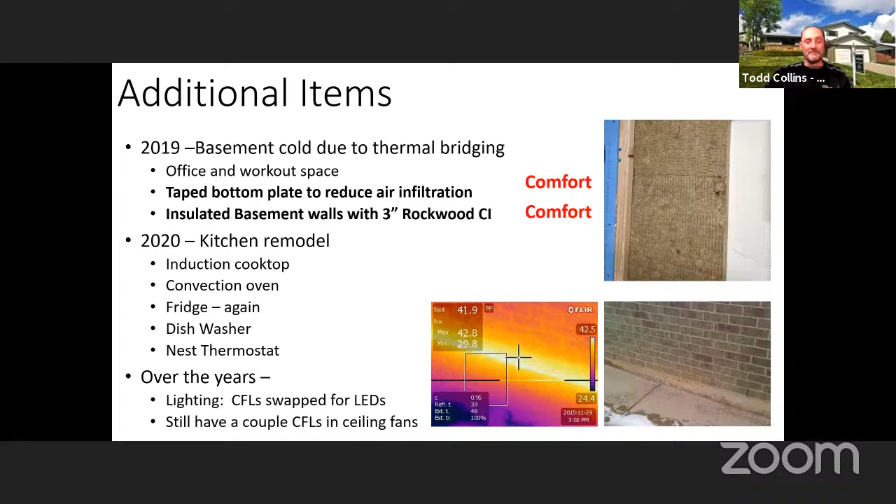So back to this - by projects, first we did some LEDs, a fridge. We also reduced our consumption by lowering our usage. Over those 2 years, we went from about 2,200 to about less than 900 a year. We went back up, and that might be a seasonal thing because it's colder one year, hotter in the summer, and we're using more electricity for AC or whatever. That delta is not significant enough to say there's anything causing it.

But we put in the ceiling fans, the washer and dryer. And then we did solar, and we started whittling down our energy use even more and more. In 2017, we hit $385 for the whole year. That's fixed fees, everything included.

We started going back up largely because our solar went down in 2019 for 4 months, and we didn't know it until we got a bill because it chewed through all of our reserves. We were netting out and basically running the meter backwards. In 4.5 months, we ate through all of our reserves, and then we got a bill, and we're like, what the heck, what's this? It went down a couple more times. There were some other hiccups, and we finally figured it out. But in 2020, pandemic, we're using more energy - kids are home, more lighting, more heating, more cooling. So we're back up to almost 500 again.

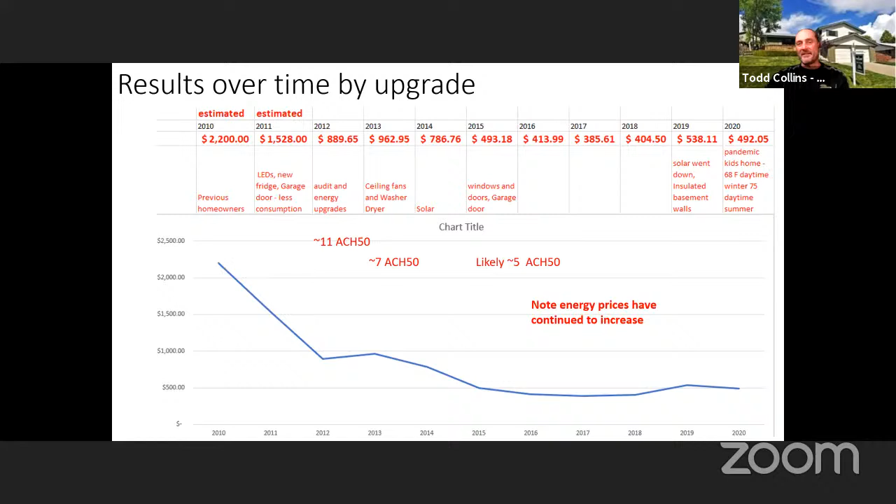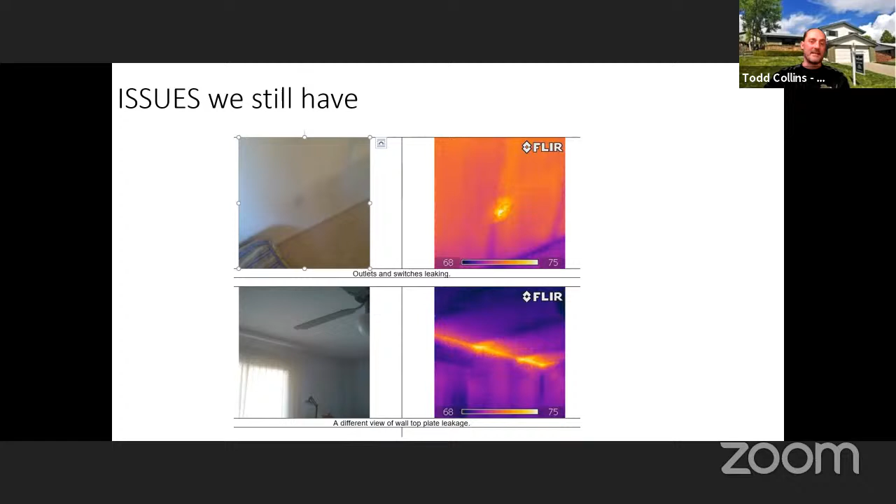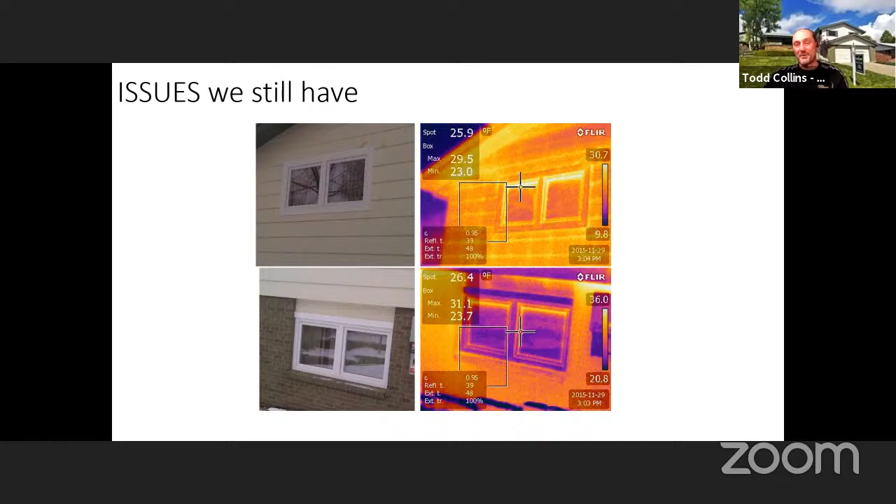So in the future, to get to all-electric and zero, we still have a gas water heater, and the goal is to go to a heat pump hot water heater. It's currently gas, so we'll go to electric. And then same with the furnace.

The way I look at it, they're not broke, why put them in the landfill? Let's use them until they get closer to end of life, and then replace them and do it right. So we'll do a whole house air source heat pump, likely a Mitsubishi with electric resistance backup for when it gets really cold, and that'll likely be in the next 5 years. The water heater we'll do in the next year or two.

Family room, we've got to relocate some ducts. That family room's so cold. And then we also need to insulate the wall between the garage and the family room. Finally, we need to do some additional insulation in the garage because we still have issues. Obviously, I mentioned that it's warm.

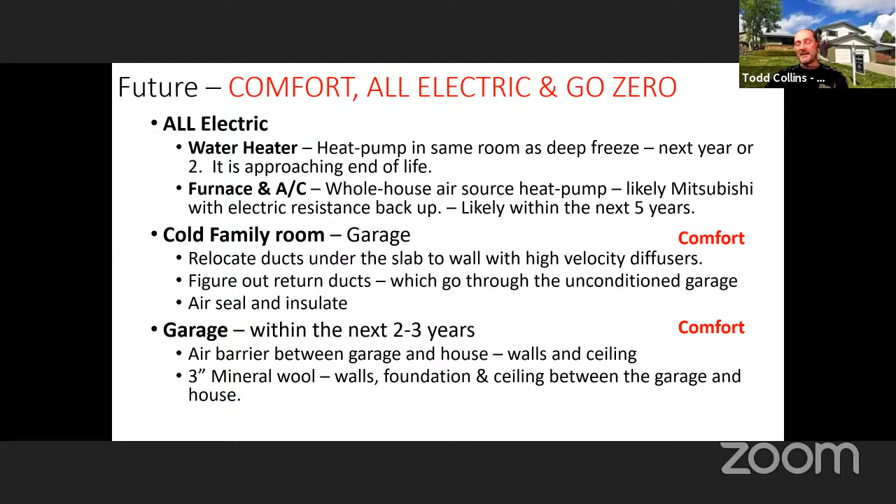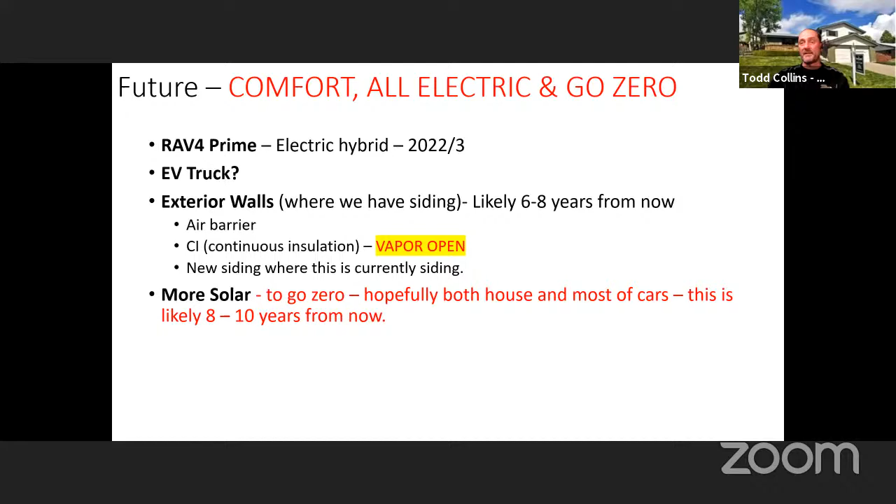So what would I have done differently? This is the opposite of what you should do, but I would have done solar first because that would have given me a much bigger system. I already made a bunch of energy upgrades, and the biggest system we could go was 120% to get all the federal rebates. So if I had gone solar first, I could have gotten a much bigger system, and I'd be able to go zero energy without having to add more solar in another couple of years when we're ready to go all zero energy.

So if we had done solar first, I'm thinking we probably would have had enough offset to go zero without increasing our solar down the road.

One thing I would have done in the attic differently was clear it completely out, cleaned all the insulation out, and started with foam at the perimeter and at the top of the partition walls, because that would have helped seal everything and insulate better in those spots, and then filled the rest with cellulose. It would have been more expensive, but I think more effective. It still worked really well though - it made a big difference in the comfort of the house.

This perlite under the sidewalk is a long story, and I'm not going to go into it, but if anybody wants to learn more about perlite, I'd be happy to chat. And then, of course, I would have won the lottery, so I could have done it all at once instead of over time.